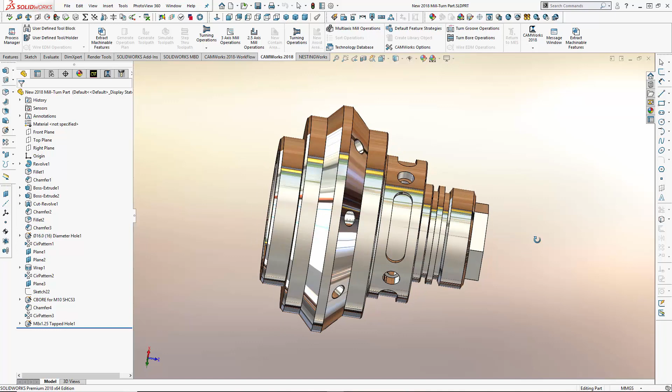CAMWorks Mill-Turn module makes programming of complex MillTurn parts easy and can reduce your programming time by 80% or more. This is a model of a complex MillTurn part typical of those used for industrial applications. How long would it take to program this part using your CAM system?

CamWorks, the most advanced integrated CAM system available today, runs directly inside SOLIDWORKS, allowing the design and manufacturing models to become one and the same. I'll begin by selecting the CNC machine I want to use for machining this part. Next, I'll define the stock I want to use. The standard coordinate systems for the main and sub spindles have already been created automatically, and just like the stock size, I have the ability to easily change them if required.

Now I'm ready to begin programming, and I'll start by running automatic feature recognition to extract the machinable features on the part. In just a few seconds, CamWorks has recognized the machinable features and added them to the feature tree automatically. I'll select the cutoff feature and convert the part off into a facing operation. Next, I can specify I want the facing operation to occur on the sub spindle, and then I'll drag and drop this operation up in the tree before the other turning features.

Because the OD and ID will require machining on both the main and sub spindles, I'll specify I want to use both spindles to machine these features. With all my features in place, I now have the power and flexibility to create individual operations for machining or use CAMWorks knowledge-based machining to automatically generate the machining operations.

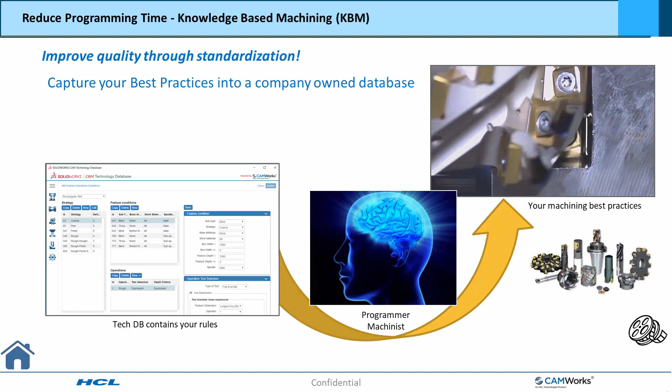CAMWorks knowledge-based machining is fully customizable, so you can capture your best machining practices, and CamWorks will automatically generate the operations with the tools, feeds, speeds, and depth of cuts using your best practices. I'll go ahead and use this time-saving feature to generate the operations necessary for the machining. Now that the operations have been generated, I can create the toolpaths.

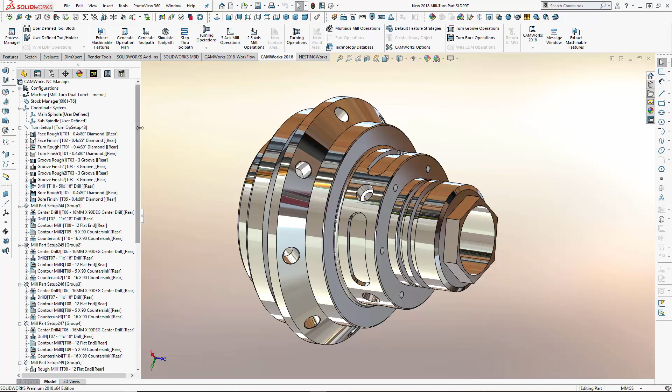Next, I'll also want to add a sub-spindle operation to transfer the part from the main to the sub-spindle. A library of my common sub-spindle operations appears. Using CamWorks, I can easily create and store sub-spindle operations for later use. I'll select the standard transfer from the list, and I can customize the sub-spindle operation.

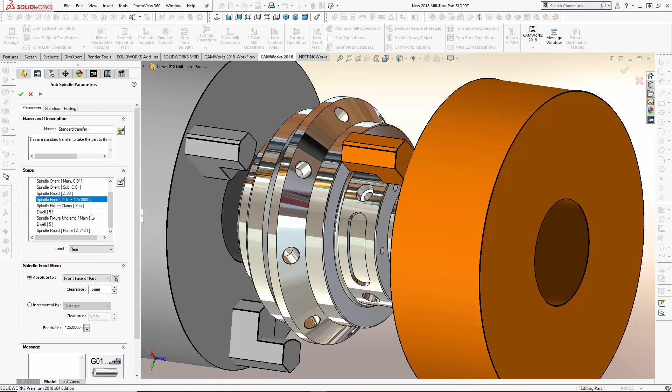Here, I'll enter the distance to feed the sub-spindle before gripping the part. Once I've created the transfer I want, I can review it step by step to make sure it's correct, and then add it to the operations tree. Now I'll open the first turn setup and specify I want to use G54 for the work offset on the main spindle. In the same way, I'll also specify I want to use G55 as the work offset for the sub spindle.

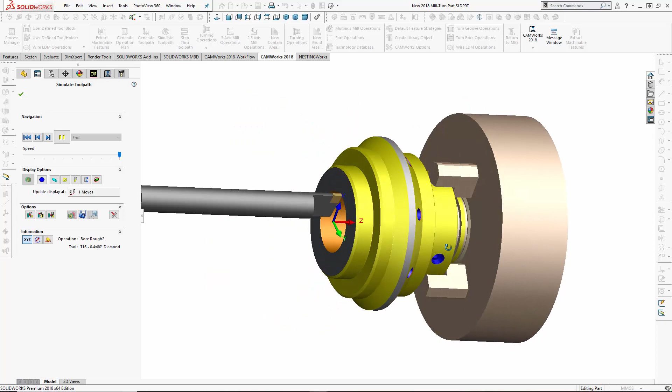Next, I'll use CAMWorks Toolpath Simulation to review the machining operations and check for any collisions. Using simulation, I can see the turning operations occurring on the main spindle, and also the turning operations occurring on the sub spindle. Once the simulation is complete, I can compare the machined model to the design model. The green color means the machined model exactly matches the design model. The blue indicates there is stock remaining. Here, I can see the wrap pockets have not been machined.

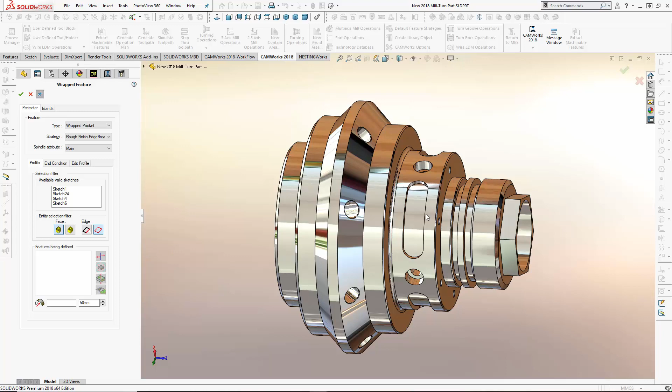Automatic feature recognition is a great automation tool, but building some features requires user interaction. I'll go back to the feature tree and right-click on a setup perpendicular to the through hole to create the wrapped pockets. I'll select the bottom of each of the pockets and then select the surface for the top of the pockets, and then close the dialog box, and all four wrap pockets are added to the feature tree automatically. Notice how even the most complex machining features can be created quickly and easily using CamWorks.

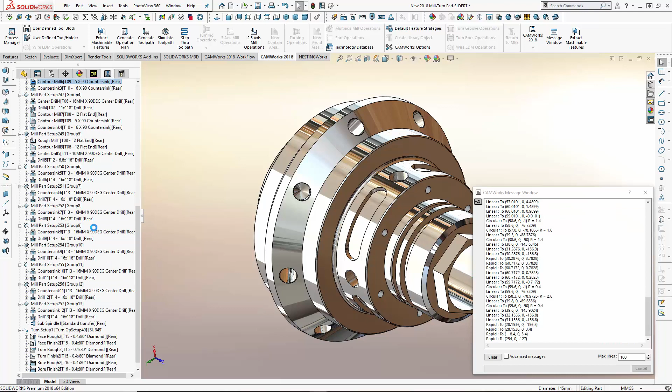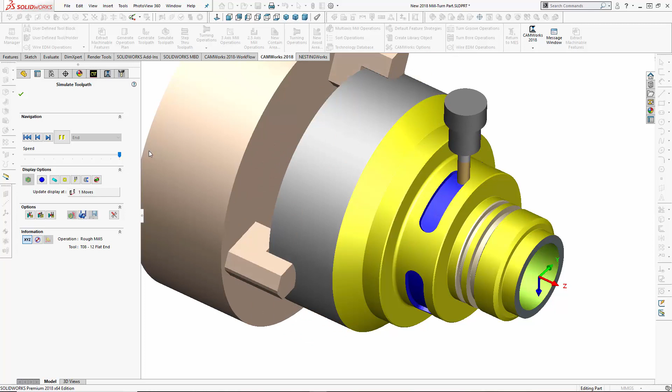Once the features have been created, I can quickly generate the operations and then create the toolpaths using knowledge-based machining. Let's run simulation again, and now we can also see the wrap pockets being machined. First they are rough milled, then finish milled, and the strategy even includes a tool to deburr the top edge of the pockets. Using knowledge-based machining, even complex machining strategies using multiple tools can be stored and reused automatically, saving you time, increasing efficiency, and improving the quality of the finished parts.

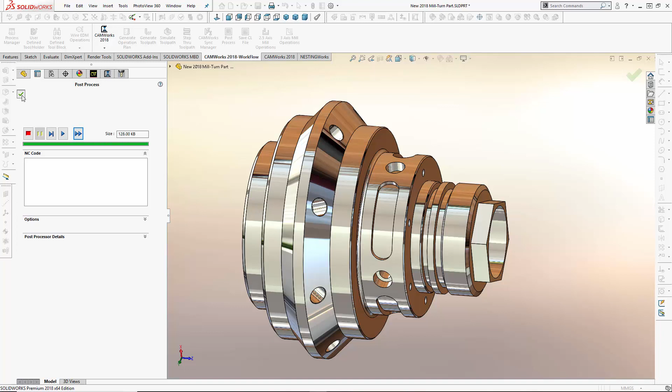I'll compare the machined part to the design part again, and now we can see everything colored green, which means the machined model exactly matches the design model, and we're ready to generate G-code for the CNC mill turn center. How long would it take to program this part using your CAM system? Using CAMWorks, this part was programmed in just over 5 minutes. I hope you're able to see the power and flexibility CAMWorks mill turn offers.